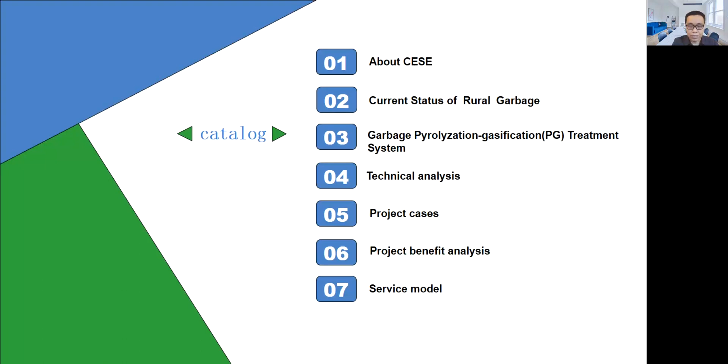Now let's begin our part one about CESE. China Environment State Technology Company Limited. CC is one of the companies of the Ministry of Ecology and Environment, which has more than 20 subsidiaries and branches in China. CC focuses on small and medium-sized towns, rural environment protection technologies, products, and related services.

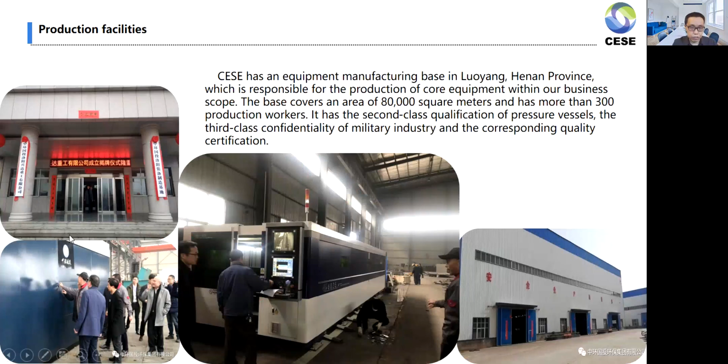CC has a highly educated and capable professional R&D team, more than 50 scientific research personnel, all with bachelor degree or above, more than half with graduate degrees or above. CC practices the strategic layout of production, education, and research integration, focusing on urban and rural environment protection technologies and products, and has obtained a number of patent technologies with independent intellectual property rights.

CC has established a long-term and stable strategic partnership with the American Gasification Association, the University of Alberta, the Chinese Research Academy of Science, Chinese Academy of Environment Science, and Tsinghua University.

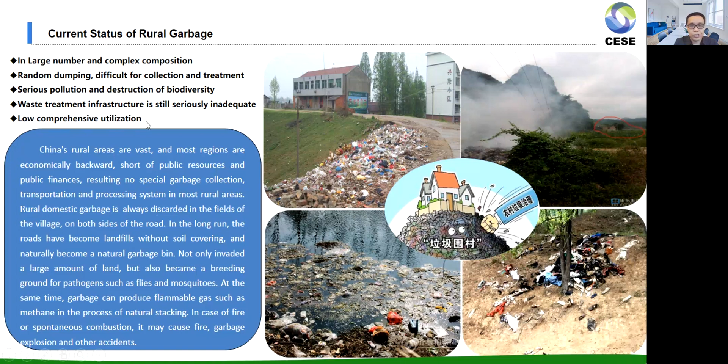Now here comes number two, the current status of rural garbage. From these photos, we can see rural garbage is large in number, with complex composition. Random dumping is difficult for collection and treatment. It can be dumped beside roads, in the river, on the hill, or even under the tree. So the waste treatment infrastructure is still seriously inadequate, with low comprehensive utilization. It's very serious.

Now, for rural garbage, there are currently three ways of treatment. Number one is random stacking. Here you can see the garbage is everywhere. And number two is simple landfill. This kind of landfill needs strict design, construction, and maintenance. It occupies large land.

Number three is garbage simple burning. At present, most of the garbage incinerators in villages don't have flue gas treatment facilities. The smoke control is difficult. It cannot meet the standard of pollution control.

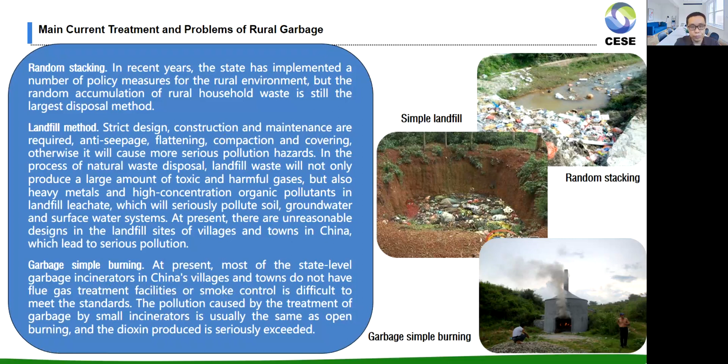Now here comes part number 3, the PG treatment system. It is our patent technology. There are three ways to treat the garbage. The first one is physical, the second one is chemical, and the third one is biological. Our critical and core technology is here, the gasification and pyrolysis. Gasification is a chemical process under the condition of less oxygen. In pyrolysis, no oxygen is needed in the process.

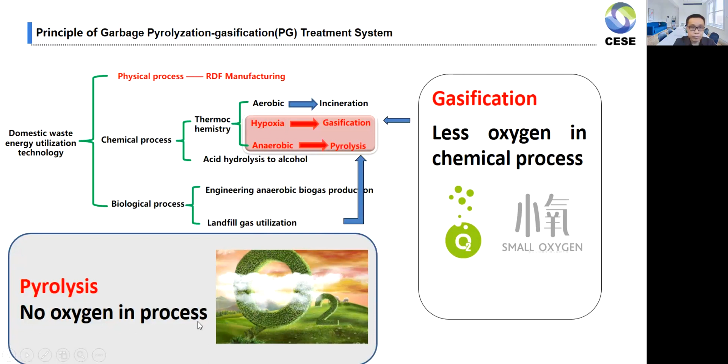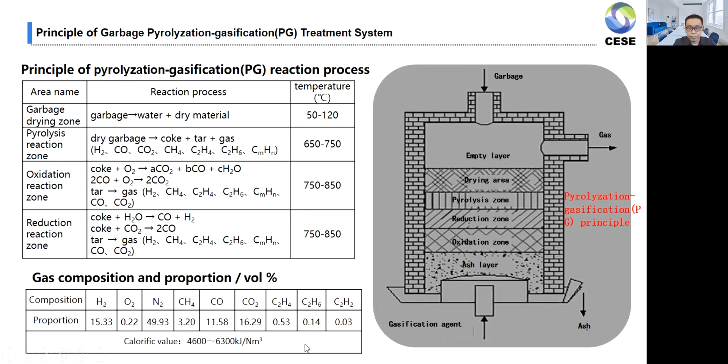In the PG system, it can treat garbage like straw, with a capacity from 100 to 600 kg per hour. The heating capacity our system can produce is 5 to 8 tons of hot water per ton of garbage at 90 degrees.

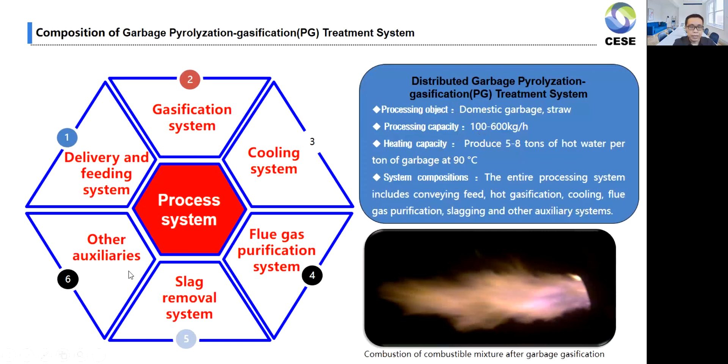In this system, there are six different sections: Number 1, delivery and feeding system. Number 2, gasification system. Number 3, cooling system. Number 4, flue gas purification system. Number 5, slag removal system. And we also have some other auxiliaries.

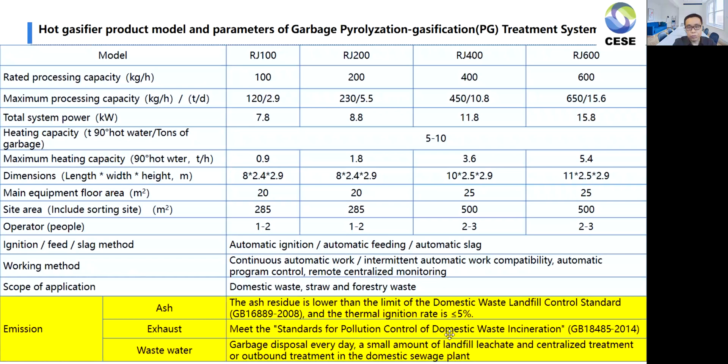Here is our main equipment, including chain conveyor, belt conveyor, hoist, gasifier, heat exchanger, bag filter, bucket elevator, and so on. Here is a layout of this treatment system.

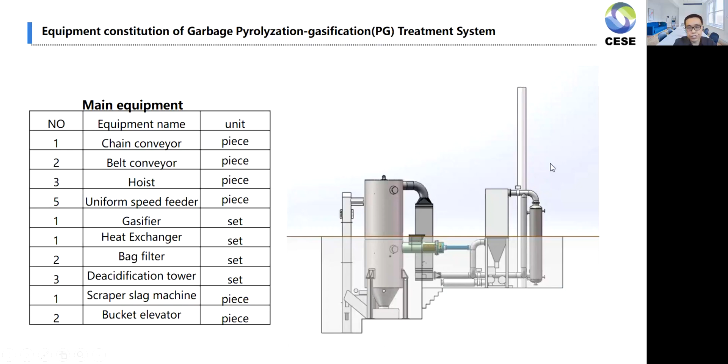Part number 4 is a technology analysis. There is a comparison with landfill, incineration, and composting technology.

The most important two parts are the advantages of our PG system. For land occupied: landfill is very large, incineration is medium, high temperature composting is small, but our PG system is the smallest. Also for environment impact, our PG system is also the smallest.

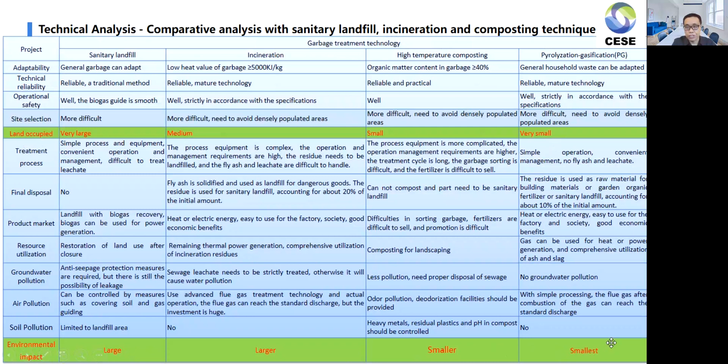Here is the technical analysis application model comparison. Normally, in the centralized processing model, there are 3 times of transportation. The transportation cost is very high, and the management chain is long. This kind of model needs more labor, so the labor cost will be high. Because there are 3 times of transportation, secondary pollution is unavoidable. So the one-time investment is also very big to afford.

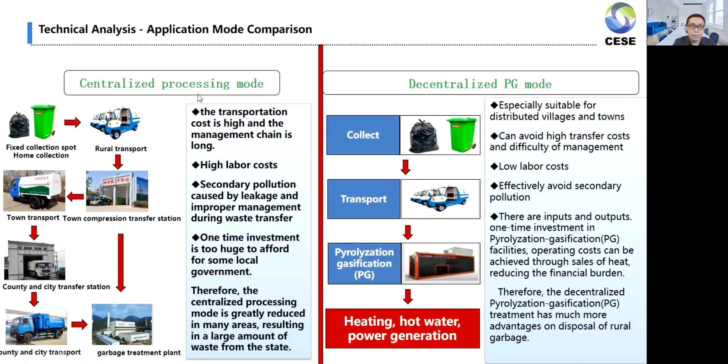With our PG system, we can use a decentralized PG model, with only one-time transport. This is especially suitable for distributed villages and towns. It can avoid high transfer cost and difficulty of management, with low labor cost, efficiency, and avoiding secondary pollution. There are also some inputs and outputs to save cost. So this decentralized PG system has more advantages compared with the centralized processing model in rural areas.

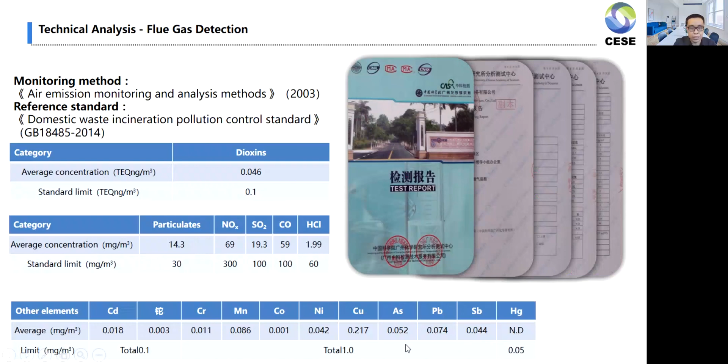This technical analysis is an ash detection. In different moisture content, the heavy metals in the ash residue are all lower than the limits of the control standard for domestic waste landfill sites. It can be used to improve soil or as raw material for production of organic fertilizer.

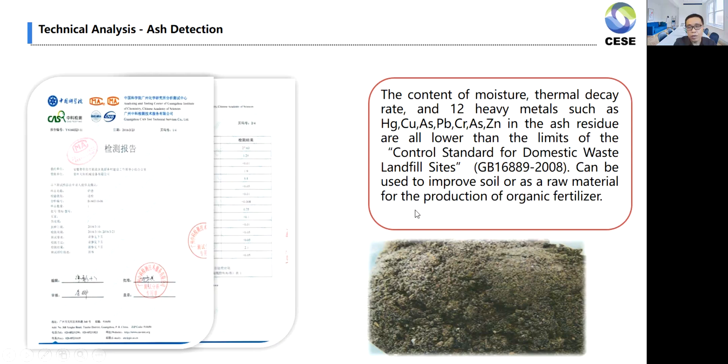Now, part number 6 is the project benefit analysis. There are 3 parts: social benefits, environment benefits, and economic benefit.

The social benefit: it can reduce the government's one-time fixed asset investment because there is no need to build a town or county level garbage transfer system, only one-time transfer. The expenses incurred in the daily operation and maintenance management of village and town garbage transfer systems can be saved.

It eliminates the garbage disposal fees. As long as the government solves the fixed asset investment, the decentralized garbage disposal model can also obtain income from heating and selling hot water. The final management chain is greatly shortened, avoiding increased management cost.

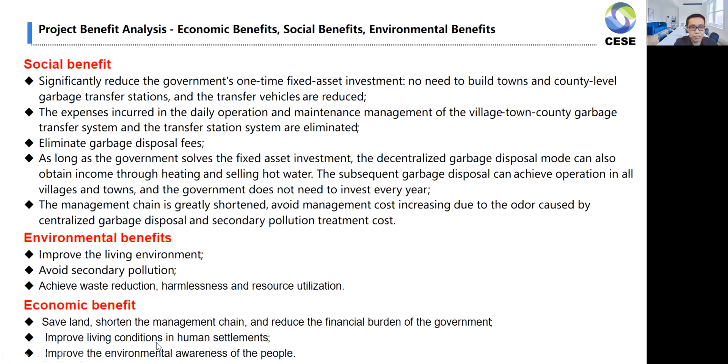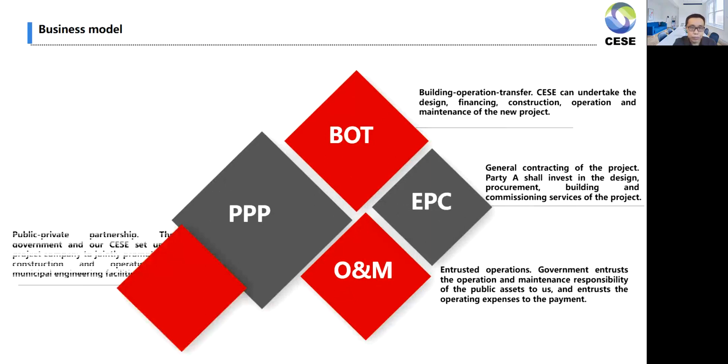The final part is our service model. CESE can offer clients different cooperation models. We can work on BOT, EPC, PPP, O&M models, and also provide equipment and services.